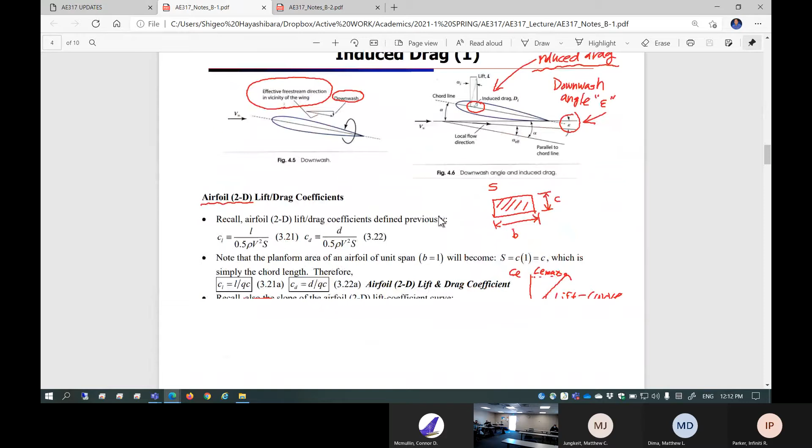I think where did I stop? I think we did page 7, right? In last class, example B11. This is a finite wing, okay? Finite wing, and then finite wing is designed based on the airfoil.

And then now you are computing how much lift and drag is developed for this finite wing, and you compare it against 2D wind tunnel test, which is a quasi 2D wind tunnel test, which determines the section lift and drag coefficients. And we compared together, and then we realize once you make your wing, obviously your performance is going to deteriorate. Lots of factors, but one of them is you're going to basically lose the lift curve slope because of the presence of downwash due to wingtip vortices. That's a big thing, okay?

So in order to create the same amount of lift coefficient, you really have to have higher angle of attack. And because you lose that, in order to have the same amount of lift produced for entire wing, you have to increase the wing area. Nothing is good, so that is the design of a 3D finite wing. So of course, 3D finite wing is based on the 2D airfoil analysis. But you need to understand, once you create the wing, all sorts of 3D effects come into play. Most of them basically is an adverse effect. So you hoped, based on the 2D analysis, you hoped this much lift coefficient, but you never get it. It's going to be always less than that.

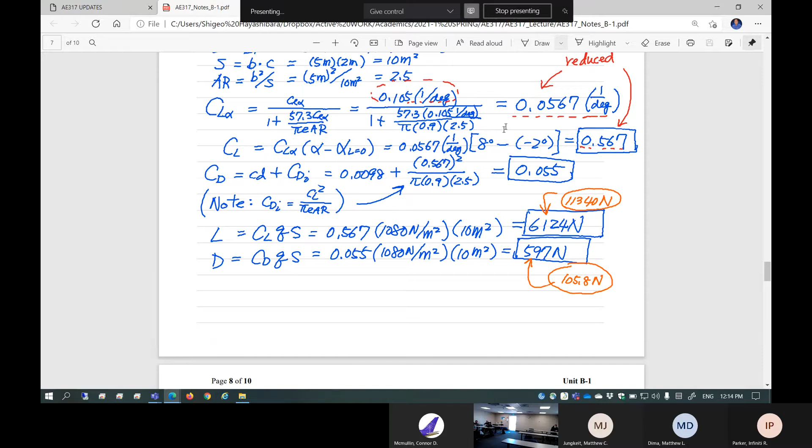Okay, so let me just add a few notes here at the end of this page. So I want to emphasize a few things. We talked about 2D airfoil, so this is your starting point. Now you looked at, based on the 2D airfoil cross-section, you're going to design 3D wing. Okay, so this is the performance.

So today, one more step. What is it? Whole aircraft. Here we go. Okay, so one more step is entire aircraft. Again, this is less performance, because the entire aircraft, the whole airplane, is composed of many things, such as tail surfaces, landing gear, and lots of unnecessary stuff, purely speaking, aerodynamically speaking.

You have to add all of those things. Antennas, wires, pitot tube, stuff like that. Surface is not that smooth, and then you're going to add more drag. As you add more, you're going to lose your lift, okay? So that's something we need to look at.

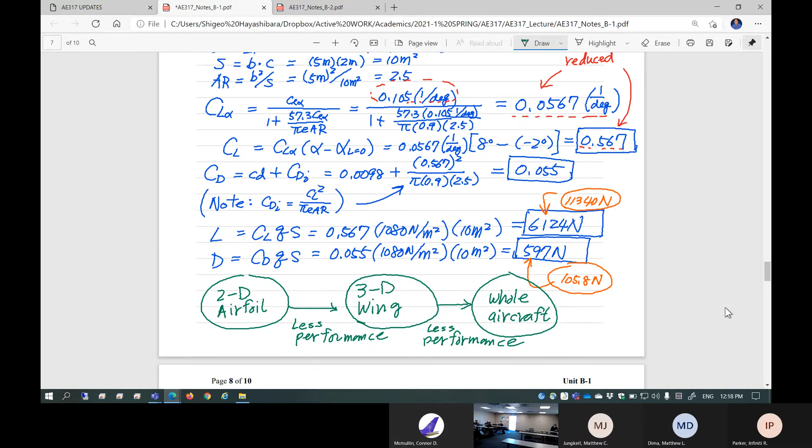I know you don't like it, but this is entirely necessary because the hand calculation actually reveals step-by-step theoretical way of calculating those things. If this class is taught by Dr. Ashworth, hand calculation is the only thing you can do. Okay, so the big difference here is I'm a computer geek, I'm using XFLR5. But somebody still needs to do hand calculation, sorry.

Okay, so let's move on, next page. So today's subject is high lift devices. You need to put high lift devices almost always, actually always, not almost. High lift devices are the device that - what is the purpose? Temporarily increase the lift, that's it.

Because when you take off, when you try to touch down, the demand comes in. You have to slow down the airplane to nicely touch down, feather touch landing. You have to slow down your airplane. You have to temporarily deploy high lift devices to minimize your stall speed. In other words, increase CL max. I think we talked about that in Aero 1. So this is the big purpose why you want to have flap. If you deploy the flap, you are going to temporarily increase CL max.

If the CL max is increased, the greatest thing about that is you can slow down your airplane and your airplane can still fly. So stall speed is going to be decreased. Okay, that's the whole point. However, this actually comes with cost. The biggest cost is, of course, it comes with increased drag. CD goes up at the same time.

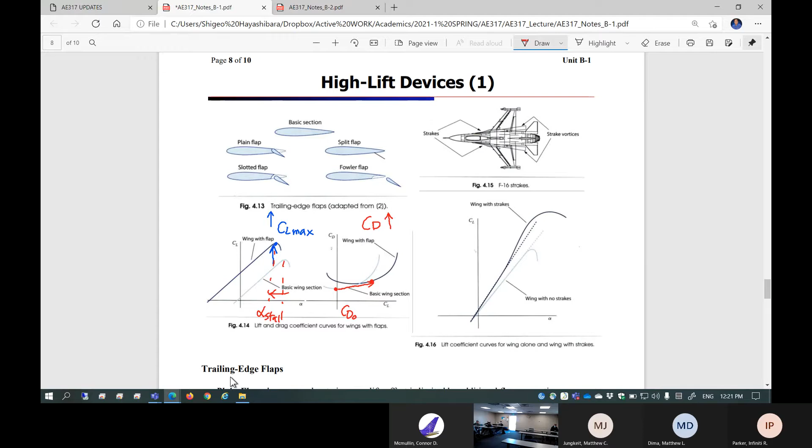Another thing is alpha stall. Angle of attack of the stall point is going to be decreased. So it's much easier to stall out if you fully deploy the high lift device and pitch up violently. Your airplane stalls very easily. So those are the things you have to pay the penalty for. However, at the same time, the greatest benefit is, of course, increase of CL max. This is what you need.

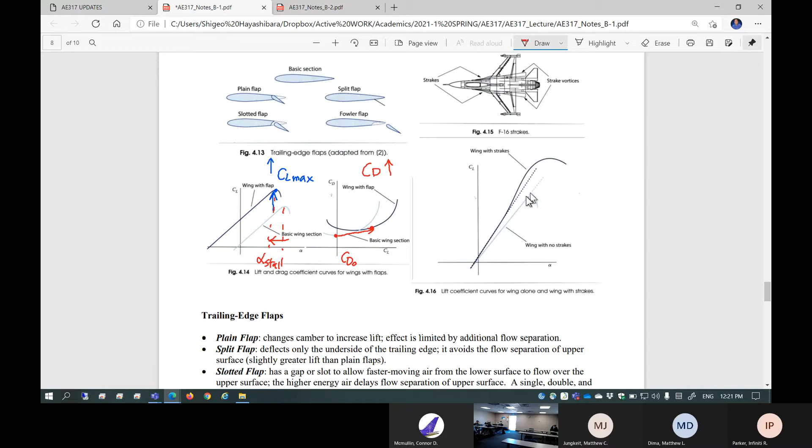So let's just take a look at a few different types of trailing edge flaps to begin with. Of course, we have leading edge flaps too, but the trailing edge flaps: you have a plain flap, split flap, slotted flap, Fowler flap. Do you guys remember those things from Aero? Let's just take a look at the documents. Do you remember those? You didn't do Fowler flap. Well, I mean, I showed you a document.

Bold Method guys. I love those people. Good pilots.

Let's just take a look at flaps. Here we go. So this is a document coming straight from there. Let's just take a look. So 4 different types of aircraft flaps. This is an explanation provided by airplane pilots. Bold Method is basically a training school for airplane pilots. So this is how they explain the flap system.

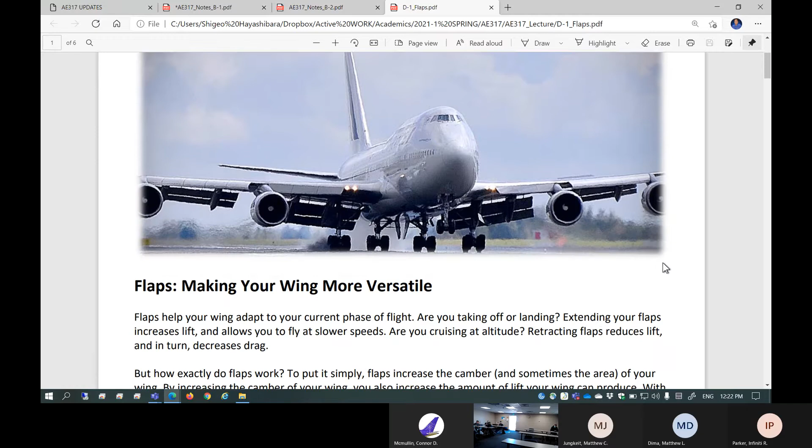Flaps, making your wing more versatile. Flaps help your wing adapt to your current phase of flight. Current phase means takeoff, landing, cruising, other things. Are you taking off or landing? Extending your flaps increases lift and allows you to fly at slower speeds. That's the big thing, of course. Are you cruising at altitude? You're not going to use flap for that because you're going to increase your drag. Retracting flaps reduces lift and in turn decreases drag.

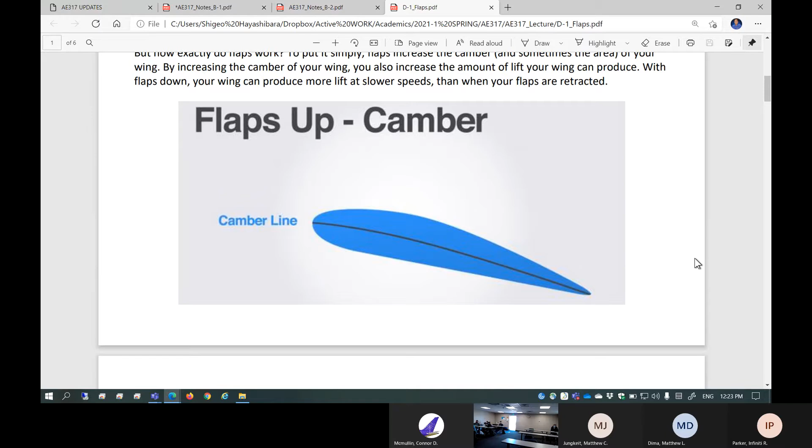So this is the clean configuration, something called flaps up. Normally, your airplane comes with a slight camber, so this is the normal situation. So suppose you have a wing cross-section that is slightly cambered. This is a cambered airplane, clean configuration at cruising. You're going to fly like this.

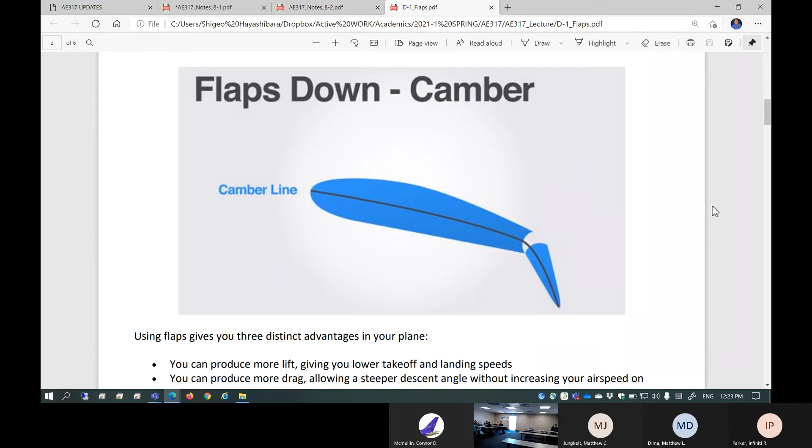Now, if you deploy a simple flap, this is a simple flap. You are going to actually increase the camber. As a result, you are going to increase the lift coefficient maximum value, CL max, and at the same time, you're going to introduce more drag. So this is a plain flap, first of all.

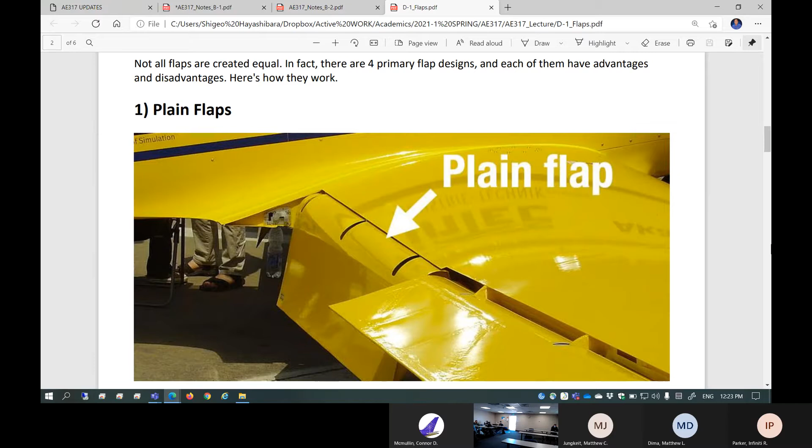So it's a very simple flap: just the trailing edge, about 20% of the chord, is going to be deflected downwards at an angle. In this case, this is a really high angle. This is like a 60, 70 degree deflected plain flap.

I'm not sure what this airplane really is. Probably a racer, Reno racer. World War II airplane based, maybe. I don't know what airplane it is.

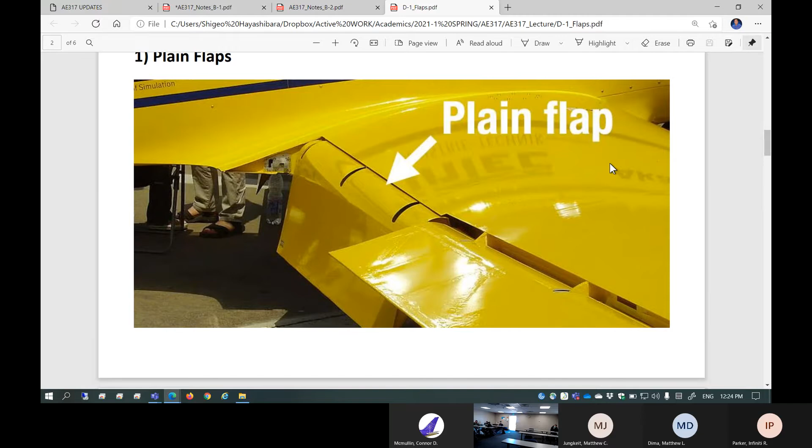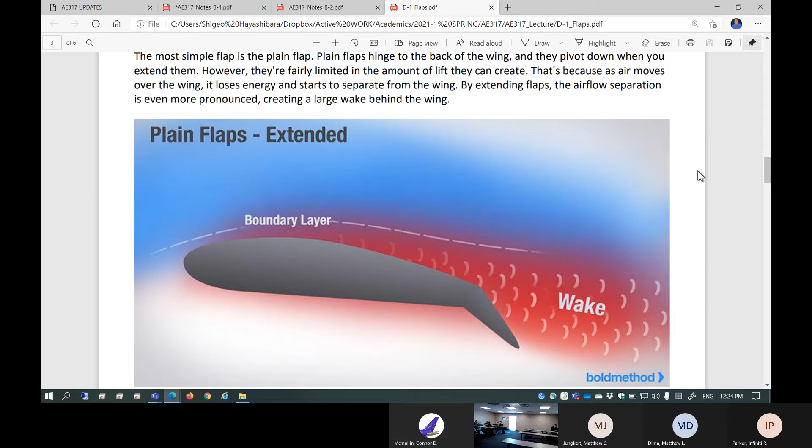But this is the plain flap. If you extend it, you are going to purposefully induce flow separation on the top surface, creating a huge amount of wake. That means a massive increase of drag and very turbulent flow behind the wing. But as a result, you are going to increase the camber with lots of penalty of drag increase. So this is a plain flap. It's a very simple idea.

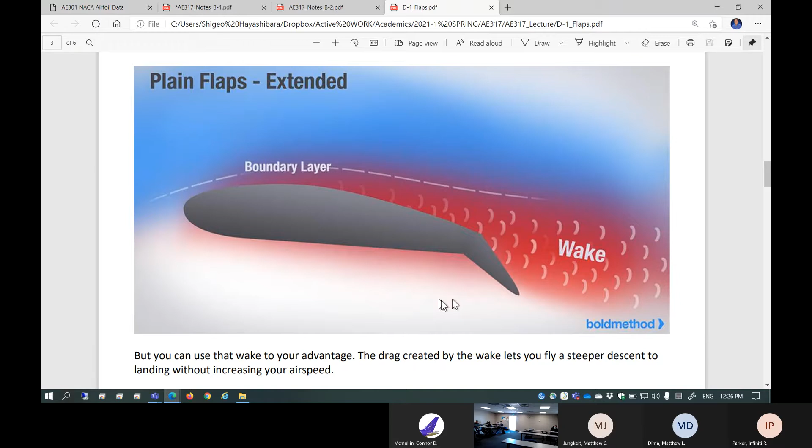Okay, so now, where is it? Oh, okay, this one. So this is the plain flap. And then the idea here is, well, I don't want to have lots of induced flow separation wake, so let's just deploy only the bottom half of it. It's called the split flap. This is a common choice for World War II airplanes. Split flap basically retains the top surface, but only deploys the bottom. It's completely split. So this is a split flap.

You're going to retain the top surface, so you're going to minimize the flow separation and the wake, but at the same time, you're going to effectively increase your camber. So this is actually much more efficient compared against the plain flap. Okay.

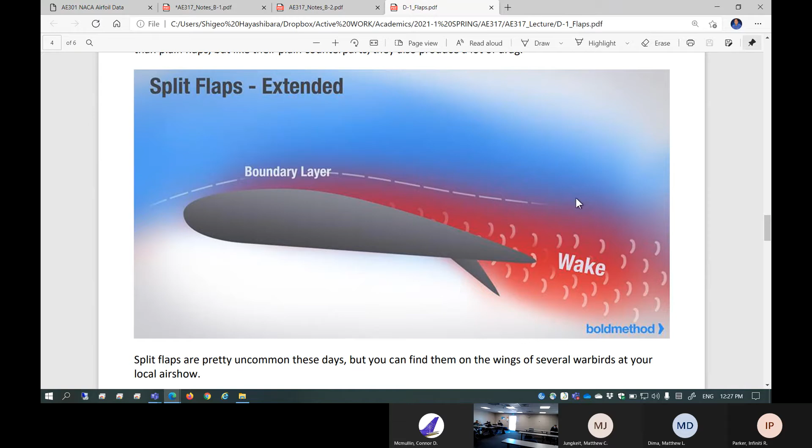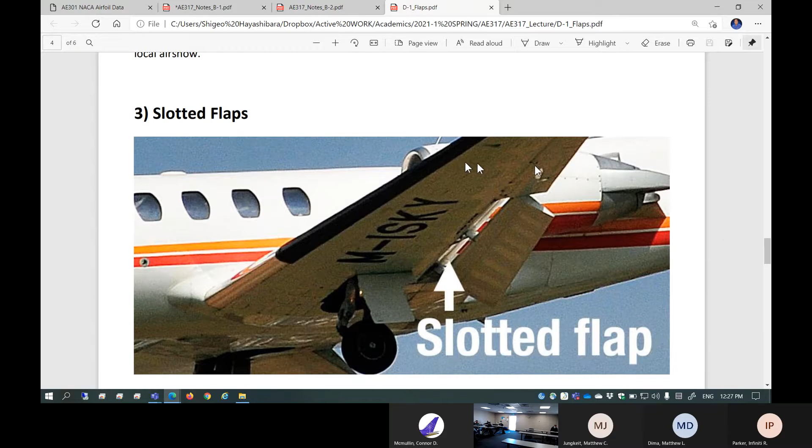Number 3 is a slotted flap. Okay. Typical choice for today's smaller scale business jet type of thing. Slotted flap introduces the slot. So you're going to purposefully introduce a portion of the flow going through this slot. If the flow is going through the slot, it is going to accelerate. Okay. So here we go.

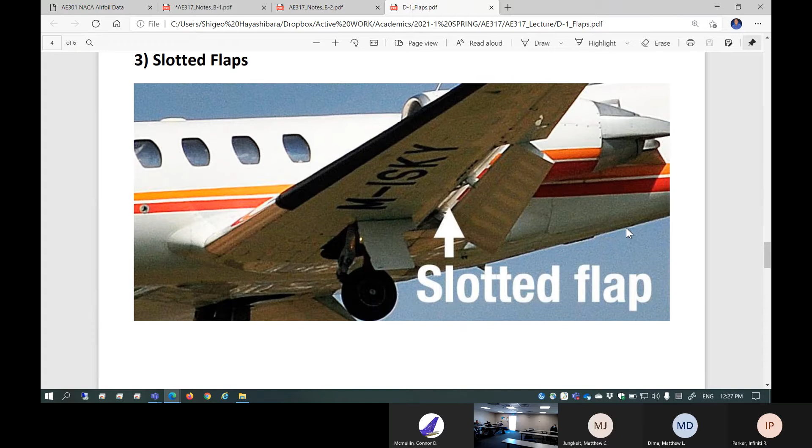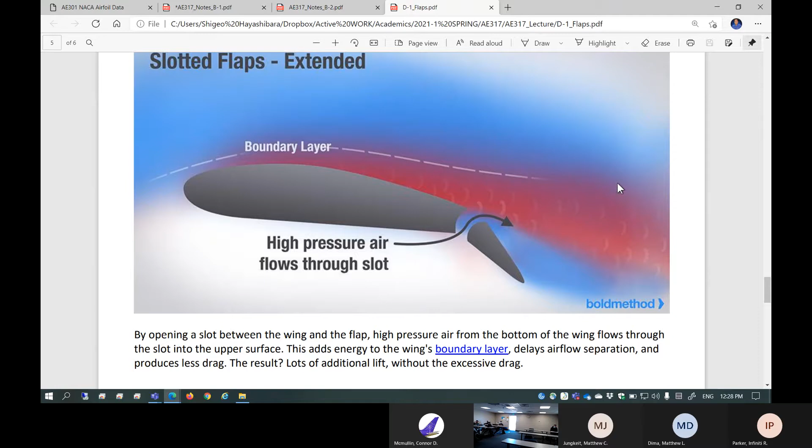So you're going to introduce high pressure accelerated flow over the top surface of this flap. That is going to completely prevent the flow separation. So the flow is much cleaner compared against the other 2 types of flaps. Okay. So this is going to actually induce the reattachment of the flow over the surface of the flap. So efficiency goes up for the flap.

And then, of course, if you take a flight to go back home, this is not the airplane cross section, right? Have you ever sat right next to the wing when you go home? And then right before the final landing approach, can you take a look at the wing? Then people say, oh my goodness, this is so dirty. I can see almost everything. Yeah, that's Fowler flaps. Here we go.

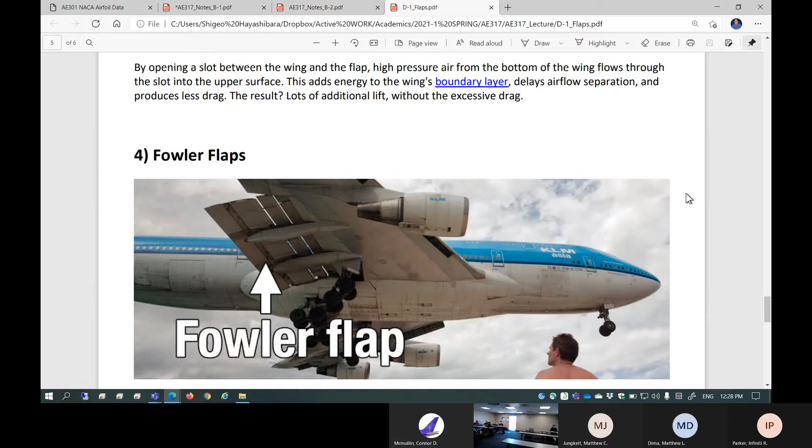Okay. So Fowler, the name means that you actually stretch out the area. Stretch out the area. So wing area is going to be increased at the same time as camber. So this is the Fowler flap. So this is a double slotted Fowler. Not only do you include those slots, at the same time you're going to stretch out the trailing edge so that now your entire wing area is bigger. At the same time, camber is increased.

And also you introduce the slots, so accelerated high pressure flow flows over the surface of those flaps, preventing flow separation. So today's jet airplanes, by employing these Fowler flaps, can actually really slow down amazingly.

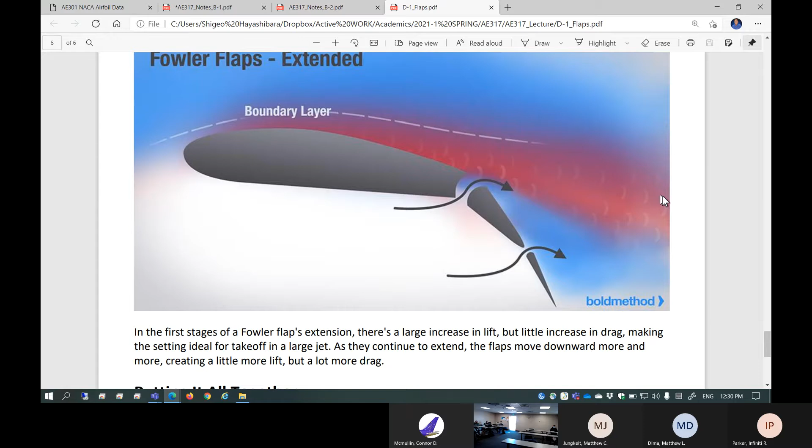There is a flight simulator in my research lab, and there is one airplane which is an Airbus A380 in a smaller scale, radio control type. You can actually fly it in the simulator, and you'll be amazed how much you can slow down. My goodness, it's almost stopping in air. You can slow down that big airplane just like that using this type of Fowler flaps. Okay, it's kind of fun, flying those things in a flight simulator, and you can really slow down that airplane. Okay, still flying.

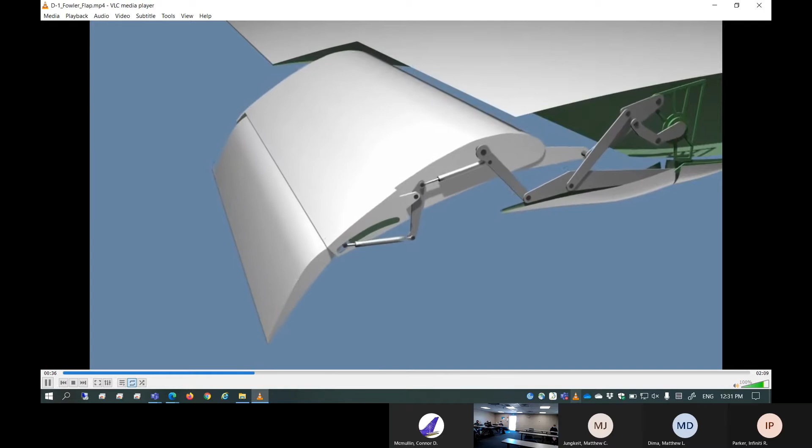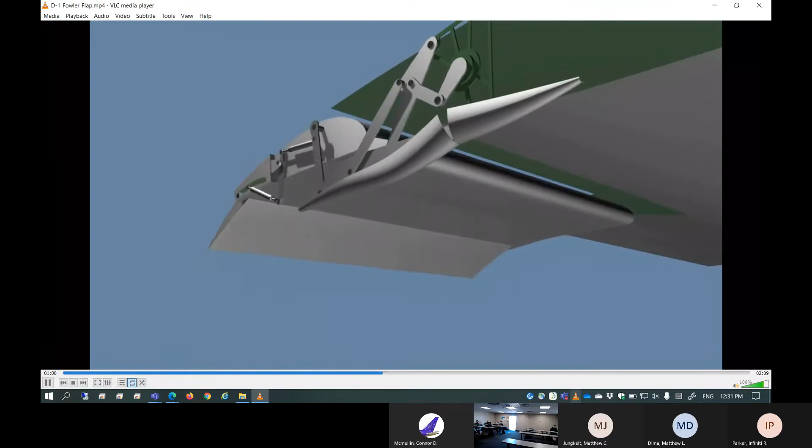I don't know if it says that I'm a big nerd or not, but I've seen this video before. This is how

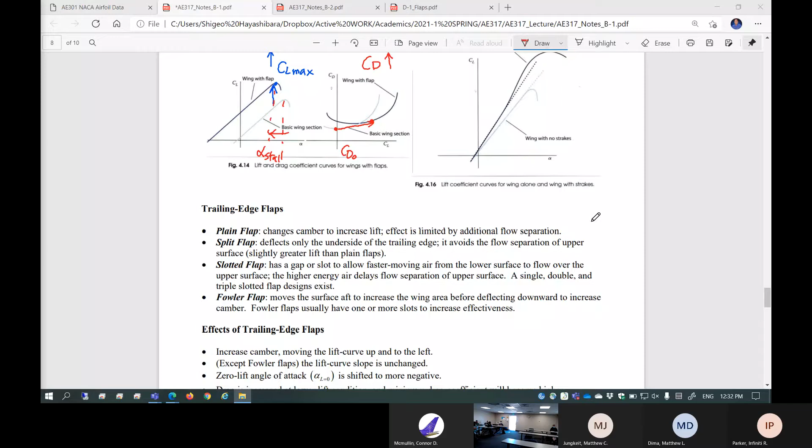Cool. So if I end up teaching senior design, I'm going to probably force students to come up with something like this, especially structures guys. And then aero guys, you guys basically become a master of XFLR5 and design everything in computer, and then come up with the performance prediction before you even build it. And then how much performance prediction and the actual performance differ is going to be your grade kind of thing.

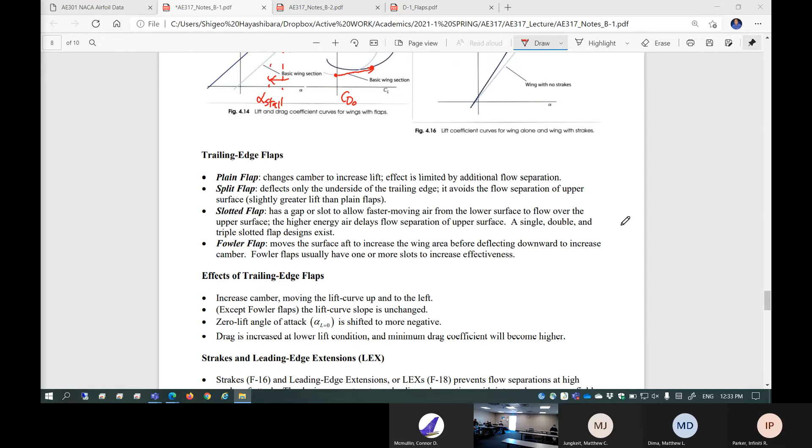Yeah, if the performance is off by like 50%, you fail. Too bad. You have to repeat this again and again. Just kidding. I can never do such a thing.

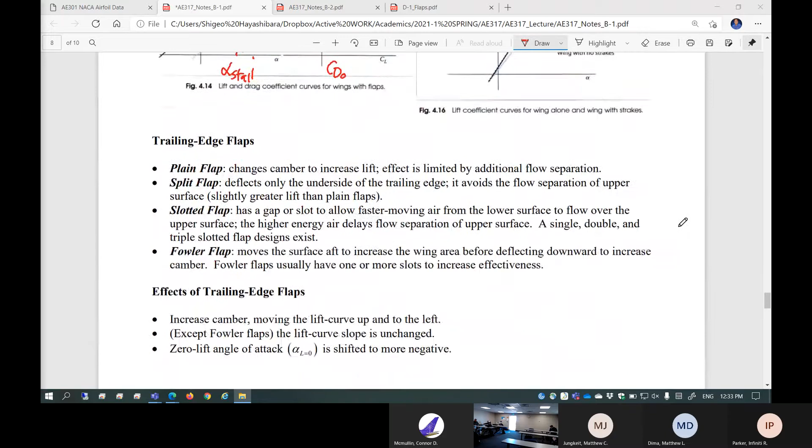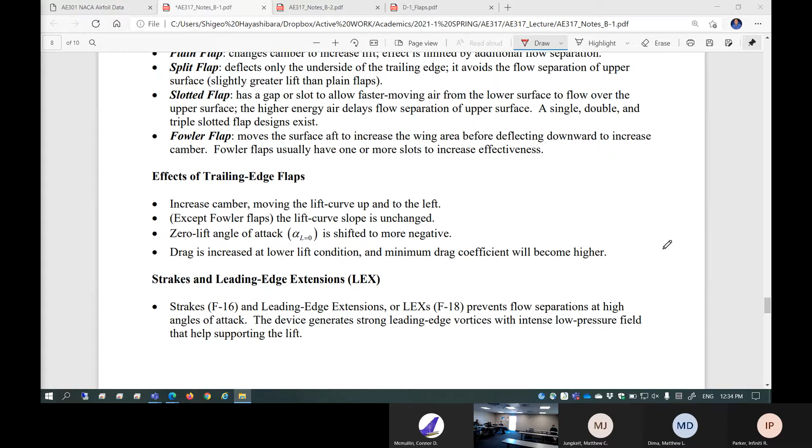So anyways, that's the high lift devices. So obviously high lift device design and sizing is going to be included in this project this semester. Don't worry too much about it because you can find out easily that XFLR5 actually integrates those high lift devices and control surfaces, and then you can actually compute and predict. It's a really fun thing to do, okay? Because if you do everything by hand, it's a nightmare, of course. Using software, you can probably do it in a few hours, at least, okay?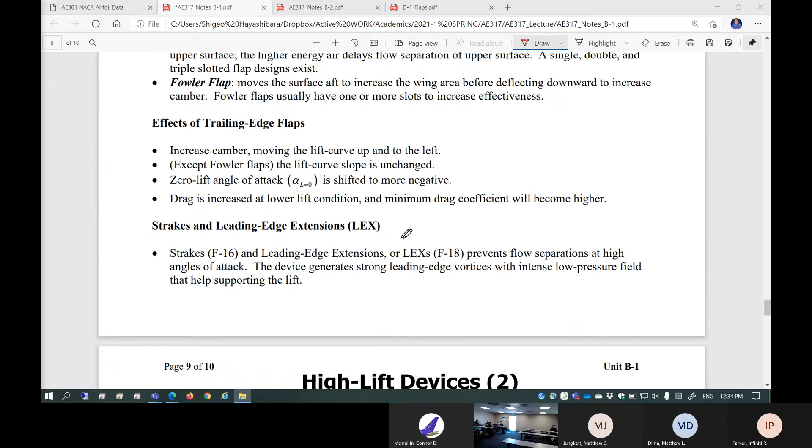And also another thing is some of the airplanes come with naturally attached strakes and leading edge extension, LEX. These are additional control surfaces, for example. Here we go. This is the F-16, which actually has strakes, and then F/A-18 Hornets have a leading edge extension that is actually going to create vortices at the tip of the strakes. Those vortices are going to impinge on your main wing, actually adding more lift to it. It's called the delta wing apex vortices.

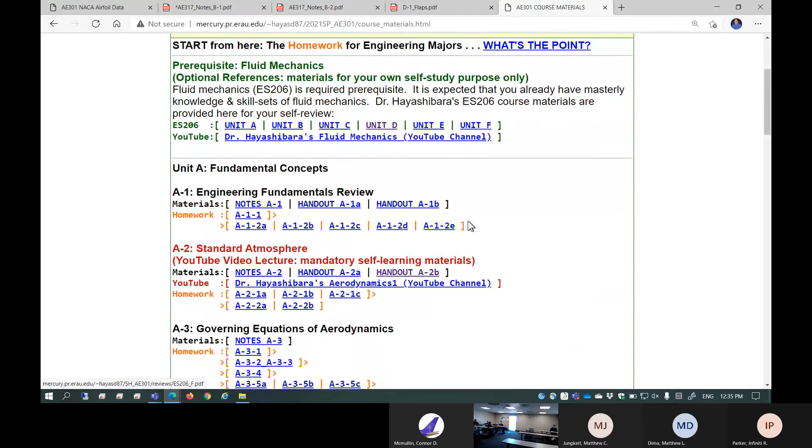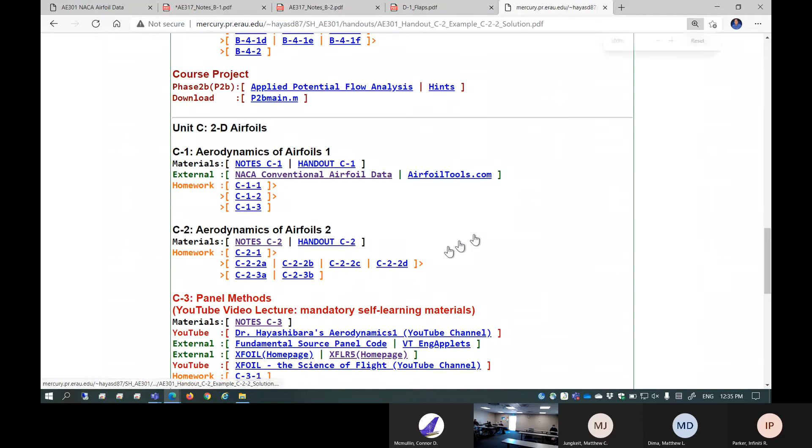Have you ever seen that in aero? Do you want to take a look at it in aero? Delta wing, okay. So if you go to the aero page, delta wing. It could be a handout, sorry. Yeah, this one. No? No. Yeah, here you go. So delta wing.

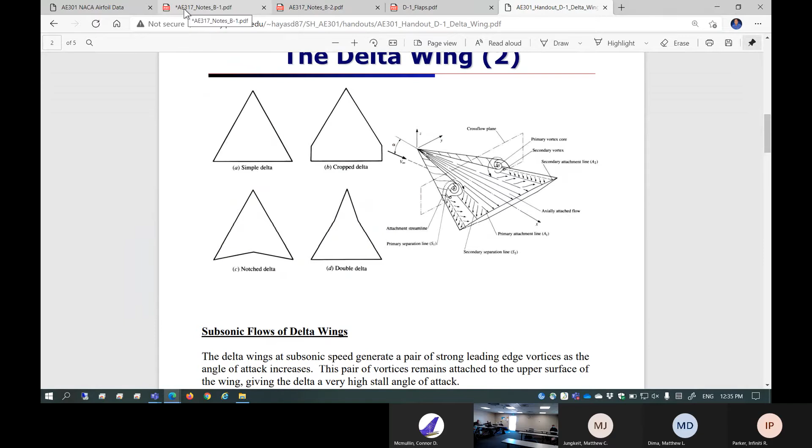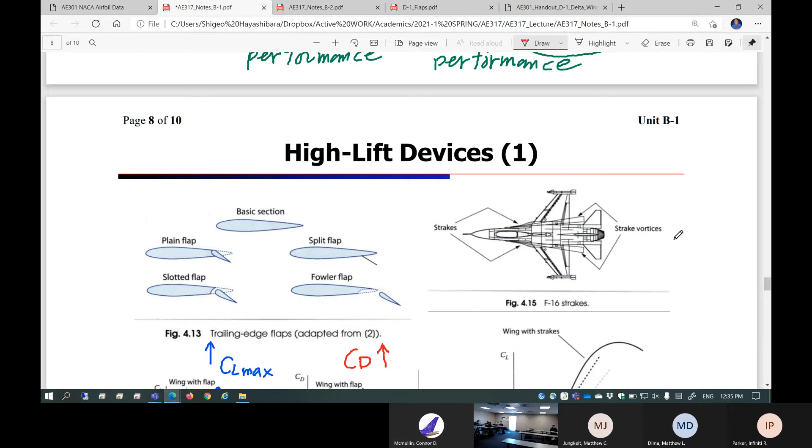So the idea of leading edge extension is that a delta wing actually creates a twin pair of vortices. These vortices actually create the lift. It's vortex lift. So your idea is basically creating those two vortices, just like delta wing apex vortices. And those strake vortices actually add some lift to the main lift of the wing. Okay. And then there's a way to estimate the additional lift created by the strake vortex, which I'm going to cover in, I think, unit B3.

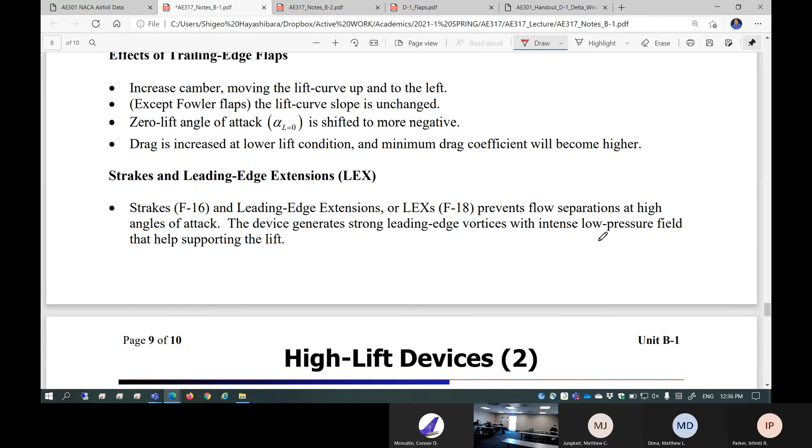Okay. There's no downwash from those vortices? No. This kind of flow field itself actually creates lift, something called vortex lift. Obviously, yeah, it's a good point. Of course, if you have a vortex like this, it is going to add more downwash. So your main wing is already placed inside the downwash of those twin vortices. But with this vortex, suppose if you pitch up, the vortex is going to come like this. Pitch down, it's still going to come like this. It's fairly parallel to the incoming flow.

So it is actually going to create a steady lift coefficient for all ranges of angle of attack, especially high angle of attack. That is quite important. It is going to be additional lift at high angle of attack, because the main wing cannot create lift at a really high angle of attack. You can't do that. But suppose you have that kind of surface, especially beneficial for a fighter airplane like this, it is going to support the lift at a very high angle of attack.

Okay. Now back in the 1990s, I was a graduate student, and we watched one of the air shows in Moscow, and there was the brand new Russian airplane, the Su-27. That airplane comes with this strake and also a canard in the forward surfaces. And one of the performance demonstrations of that new Su-27 version was the Cobra maneuver. Do you know the Cobra maneuver? The airplane is flying like this, pitches up beyond 90 degrees, pitches down and flies like nothing happened. It's called the Cobra maneuver.

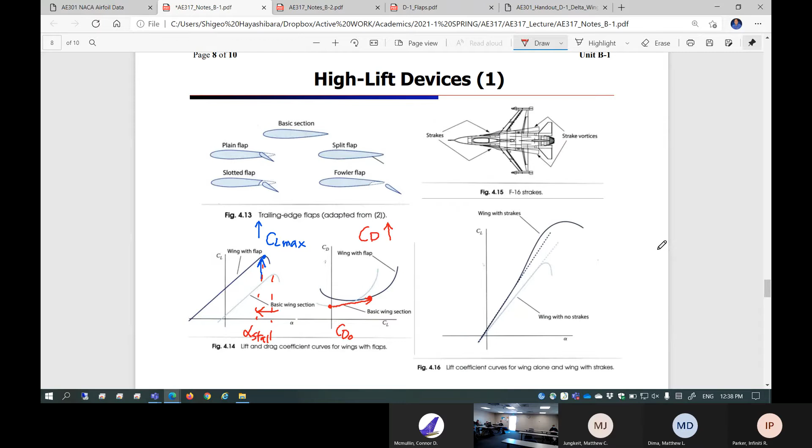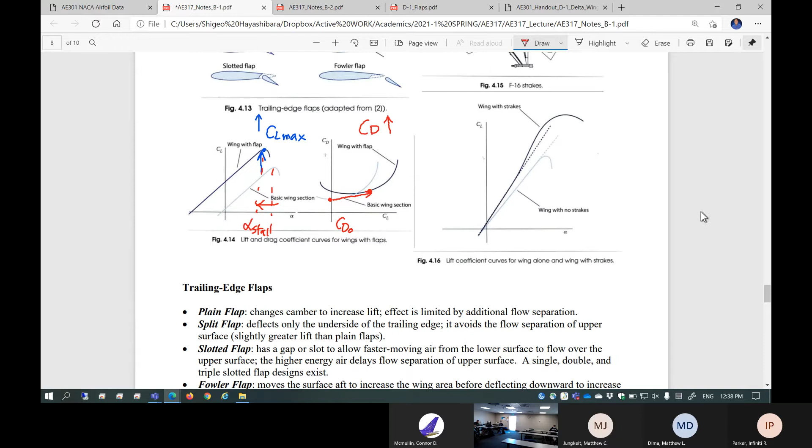And that blew away all the graduate students watching that air show. I was there too. And then we brought that discussion into the classroom, and the professor and students started to argue. Oh, they're faking, the Russians are faking that. No, it's not. Anyways, the Cobra maneuver, that's a pretty interesting maneuver.

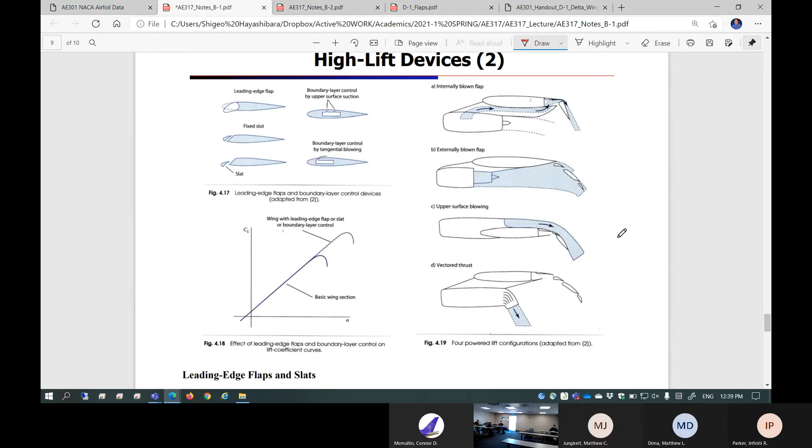You purposely place your flap or high lift devices inside the wake of the jet engine so that you use the jet hot gas exhaust hitting on the surface. This is the upper surface blowing. This, by the way, is the technique used for the airplane sitting right next to the bookstore.

With this kind of wing, how can you slow down your airplane? You need to have some kind of gimmick just like this. This is called upper surface blowing. In other words, engine exhaust hits the surface of the flap system, preventing flow separation.

If you are designing a low-speed airplane, you're not going to choose a wing shape like this, right? This is a horrendously bad airplane for low speed. So you have to do something.

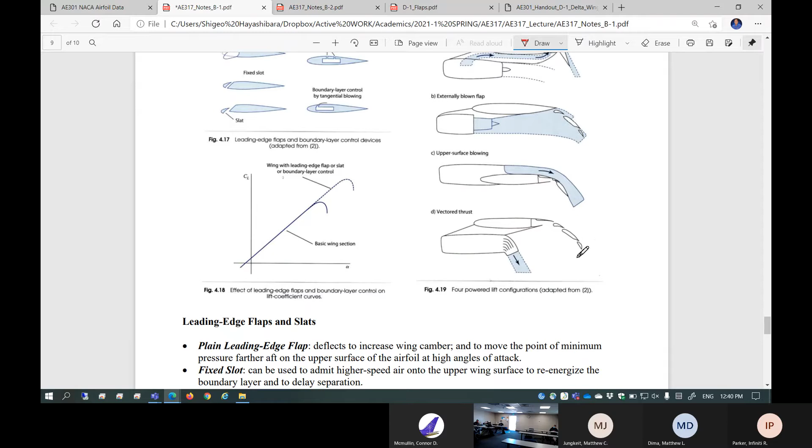The other one is vectored thrust. Obviously this is what the F-35B, and also the Harrier, use. It's a classical design of vectored thrust.

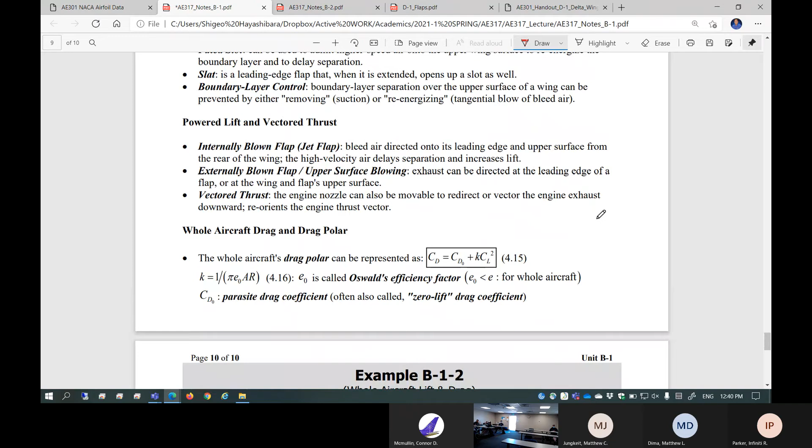So let's just stop and take a look at this thing. Now, all of a sudden, very suddenly, I'm talking about the whole aircraft. Whole aircraft means everything: airfoil, 3D wing, plus all others. This is the whole aircraft.

As you look at the entire aircraft, as you design it, it is very difficult if you do it entirely by hand, but you can do it fairly easily using software. That's the beauty of using software. You are going to define the entire aircraft drag polar. This is not something you can do easily by hand. You need software just like XFLR5.

But after you put everything together, you choose your 2D cross-section, build the wing, put the fuselage and tail and control surfaces and other things. Then decide the location of your engine and propeller, and put the mass distribution on it, landing gear, and so on.

Now you can pitch your entire airplane up and down to come up with the whole airplane drag polar. You can do that in XFLR5. That's one of the greatest benefits of that software. If you're designing by hand, this is near impossible—you can only guess. So this is one of the greatest things you can do: the whole aircraft drag polar.

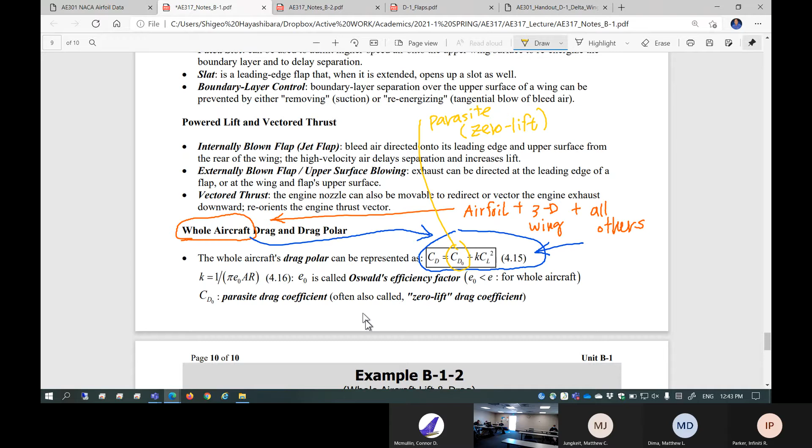Then as your airplane starts pitching up and producing lift, and more and more lift, your drag increases based on the lift. This is called induced drag, or drag due to lift. So there are two different kinds of drag coefficient you need to consider.

Those two different kinds of drag coefficient can be represented by a polynomial function, and you can find out and squeeze out that polynomial function information using software. At this moment you realize, hey, using this software, you can do something you can never do by hand, at least not easily.

So this is called the induced drag, or drag due to lift. Interesting thing is, as you increase your lift more and more, you're also going to increase your drag. Too bad.

Okay, so this is the whole airplane. Interesting thing is this K factor. This K factor now includes something called E0.

E0 is called Oswald's efficiency factor, because this is for the entire airplane. Now, if you remember from last class, we introduced the span efficiency factor E. You remember that? E is the span efficiency factor.

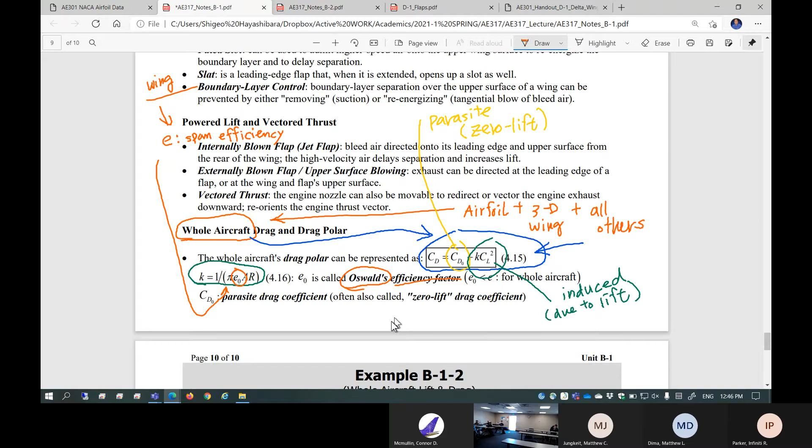Okay, so let's differentiate. E is the span efficiency for the 3D wing. This is going to be even further reduced to Oswald's efficiency factor after you put everything together to make the entire airplane. Let's be very careful about the terminology. I'm going to introduce you for a moment here.

The handout. Okay, let's just take a look at the handout. Handout B2A, before you even get into B2. This handout is quite important. Let's just take a look at it.

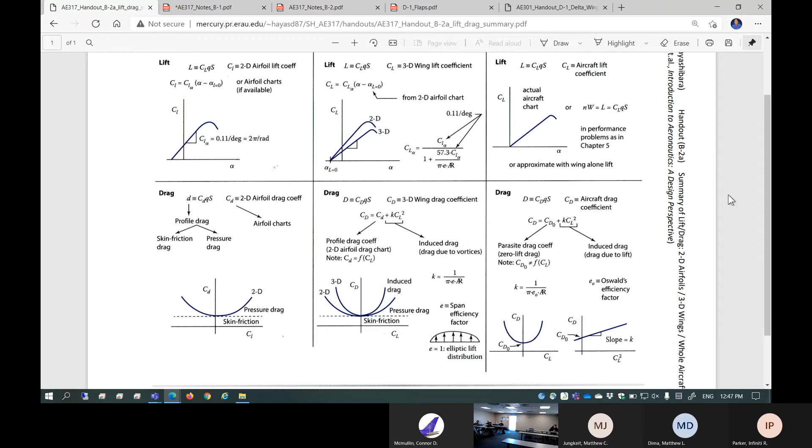This actually summarizes all three differences: one is 2D airfoil, the other one is 3D wing, last one is whole airplane. This one-page document is so wonderful, so I decided to put it as a handout. Essentially, in order to understand airplane aerodynamics, this is all you need. This is so good, I fell in love with it.

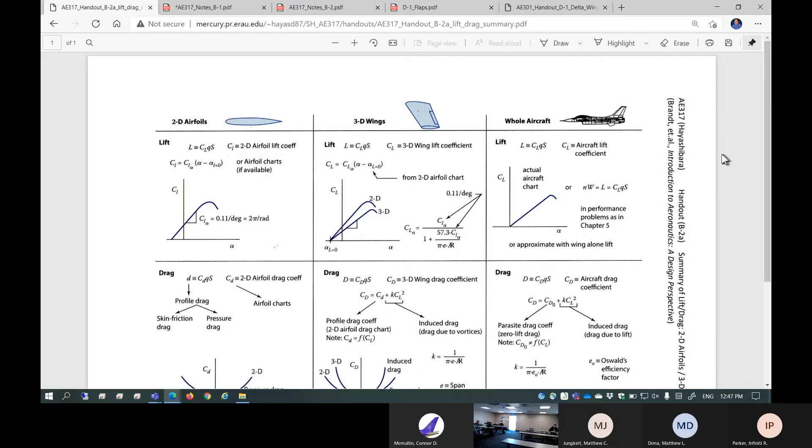So for 2D airfoils, lift is basically the 2D airfoil lift coefficient. This is a prediction of the lift coefficient. This is the lift curve slope, usually 2 pi per radian, of course you know that. If you create the wing out of a 2D cross section, obviously you're going to reduce the slope.

Now this CL is the 3D wing lift coefficient. Now CL alpha is reduced from CL alpha. This is the equation, of course. Then suppose you create the whole airplane, now everything is included. So this is the CL alpha plot, and then you have to think about load factor N.

Load factor N, we're going to talk about that. Drag coefficient is more complicated. So you begin with the drag polar for the 2D profile. The 2D profile consists of two things: skin friction drag and pressure drag. Skin friction drag is this much. Pressure drag is basically, as you increase your lift, you increase your drag. You can get all this information from airfoil charts: NACA 4-digit, 5-digit, 6 series. You can look up and get those data sets here.

However, if you design your 3D wing, obviously it's not going to be the same thing. Of course, span efficiency factor comes in here, K CL. This E is the span efficiency, the wing's efficiency. And CD here is the profile drag coefficient—the 2D data comes into play because CD doesn't change. Pressure drag is different. Skin friction drag doesn't change from 2D to 3D. However, for the 3D wing, you're going to have more drag, obviously.

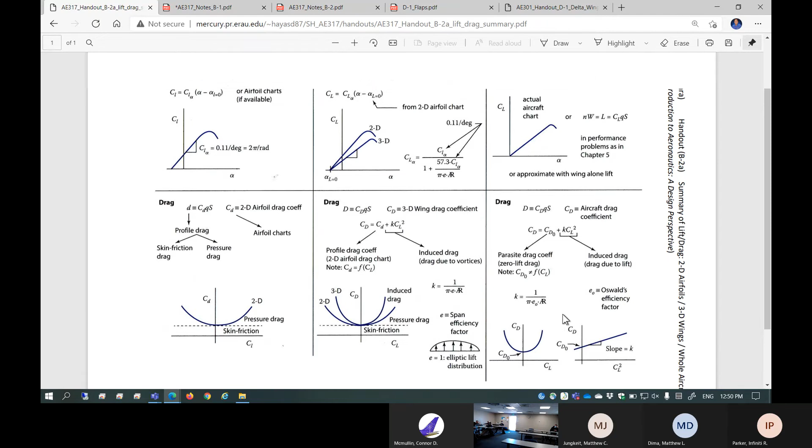And then, the entire airplane—obviously now you introduce Oswald's efficiency factor right here. This is even worse than that, because the entire airplane now comes into play. So this CD0 is the parasite drag coefficient, or sometimes called zero lift drag coefficient. Now you have an entire airplane drag polar. This is CD0, CL squared, CD—slope is K.

This is basically the induced drag coefficient plot. So this is the CL alpha plot for the entire airplane. Usually for the entire airplane, zero angle of attack means zero lift, typically, because when you design your airplane, if you don't pitch up, you don't want to create any lift. If you put in camber, obviously you introduce alpha zero lift, but that's essentially the subject of the wing. As you design your actual airplane, alpha zero lift is usually zero.

So there are lots of differences. Do not get confused—it's so easy to mix up this CL with this CL with that CL. Those are all different. And at the same time, this CD with this CD with this CD—those are all different too. You have to differentiate between all three: one is airfoil, one is wing, one is the whole airplane, okay?

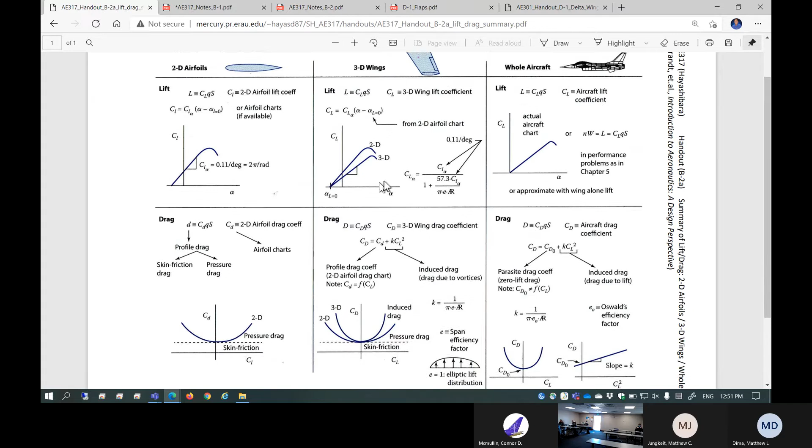All right, let's take a look at page 10, example B-1-2, whole aircraft lift and drag.

So let's think about the Avro Vulcan jet bomber. Have you ever seen this? Do you know what the Avro Vulcan is? Let's Google and find out.

So this kind of airplane, here we go. Why is this airplane chosen? Because it almost looks like just a wing, little bit of fuselage. And then this is interesting—it's not quite a delta wing. It's like a delta shape, but you have a finite chord at the tip.

But there's no tail, right? So this is a classic design of tailless delta wing. You can actually make it stable without the horizontal tail. Tailless delta, how about that? People still make this kind of airplane—people in France still make it. The Mirage. Okay, so this is the Avro Vulcan.

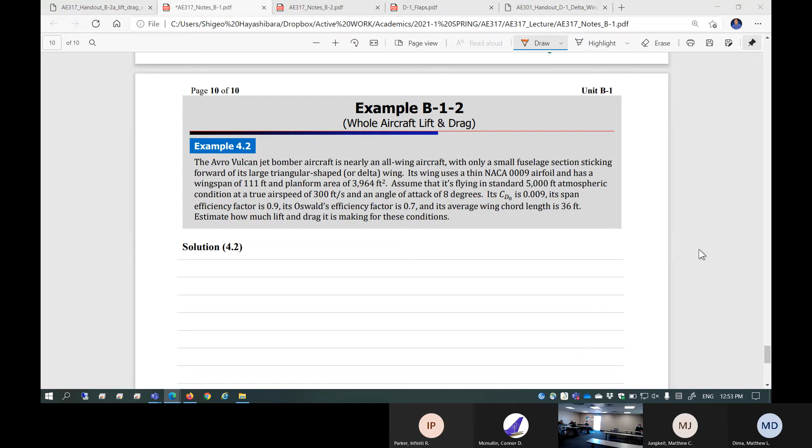So the Avro Vulcan jet bomber aircraft is nearly an all-wing airplane with only a small fuselage section sticking forward of its large triangular-shaped, or delta, wing. Its wing uses a thin NACA 0009 airfoil.

I don't think this is correct, but let's just follow through with it. Its wing uses a thin NACA 0009 airfoil—this is a symmetric cross-section, 9% maximum thickness at the quarter chord, NACA standard 4-digit. And it has a wingspan of 111 feet and planform area of 3,964 square feet. That's a huge planform, okay.

Assume it's flying in standard 5,000 foot atmospheric conditions—let's assume 5,000 feet standard atmosphere, true airspeed of 300 feet per second, angle of attack 8 degrees. Now interestingly, its CD0 is 0.009. This is given.

Quite interestingly, you can never get this information unless you design and analyze it as a 3D entire airplane, okay? Entire airplane, because this is the parasite drag coefficient of the whole airplane. Now if you design everything by hand, this kind of information can only be obtained by actual flight testing. So anyway, this is given.

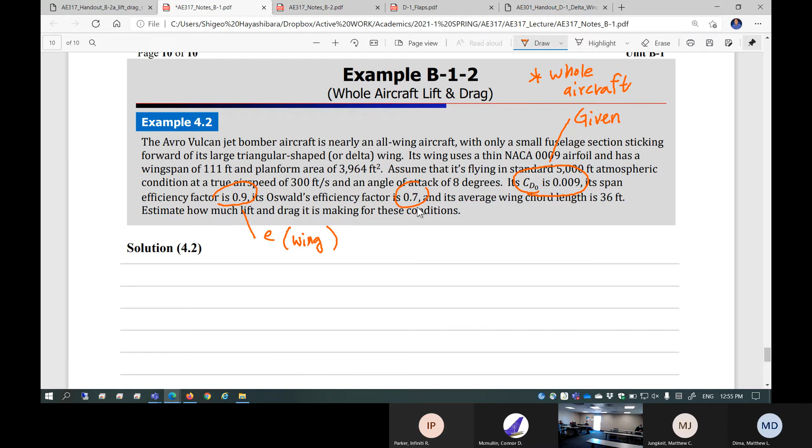Span efficiency factor, 0.9—this is e, isn't it? So this is only for the wing, not the entire airplane. So the wing has a span efficiency of 0.9. Oswald's efficiency 0.7—this is for the entire airplane, e0. This is whole aircraft.

Okay, so let's notice the difference. One is span efficiency, which is wing only. The other is the whole aircraft's Oswald's efficiency factor, which is really less than that. Average wing chord, 36 feet—let's call that c-bar, average chord. Obviously, the wing is not a rectangular wing, it's almost triangular, so you have to take the average value of chord.

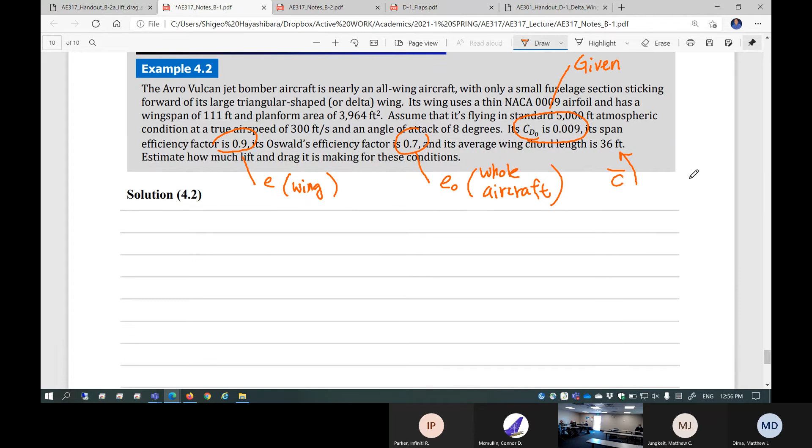So let's estimate how much lift and drag it's making for these conditions: 8 degrees angle of attack, true airspeed 300 feet per second, standard 5,000 feet altitude. So what is the first step, you think? What is the very first thing you want to do? Let's find out Reynolds number.

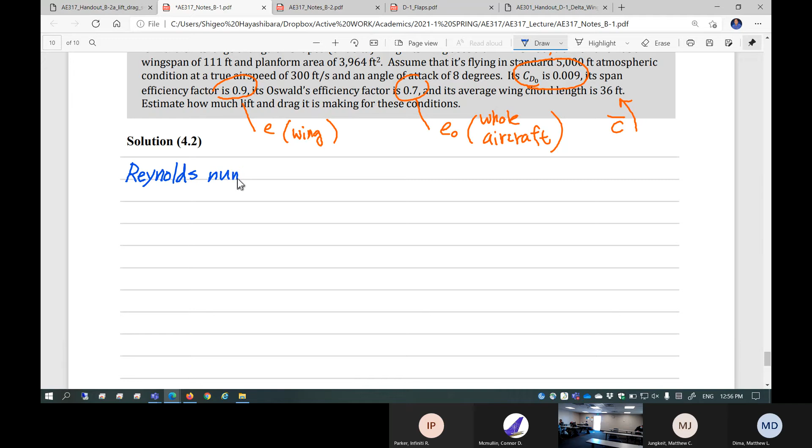Reynolds number, based on 5,000 feet standard altitude. Okay, so let's just find out. Flight condition Reynolds number is density times velocity times chord length, divided by viscosity.

So I'm going to plug in all the 5,000 feet standard values. Density at 5,000 feet standard day: 0.002048 slugs per cubic foot—this is the standard 5,000 feet value. Velocity, or true airspeed, is given as 300 feet per second. Average chord length, 36 feet. Viscosity at standard 5,000 feet altitude: 0.0000003637. This is a weird small number because we're sticking with standard units, slugs per foot-second.

Some people don't want to use this kind of weird small number, so they use pound-mass instead, but you have to combine units anyway, right? Okay, so if you compute that, you should get a Reynolds number of 60 times 10 to the 6. This is a very high Reynolds number.

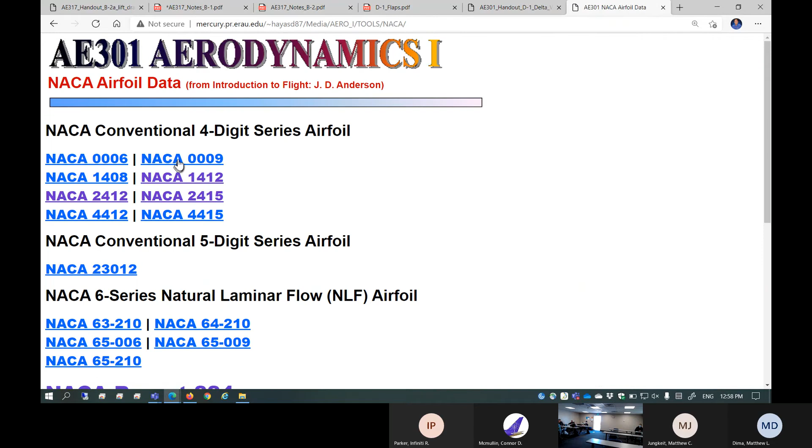So if you go here, NACA conventional airfoil data, NACA 0009—here we go. This is the NACA 0009. The highest Reynolds number you can have is 9 times 10 to the 6. This is the highest value. In this case, our Reynolds number is 60 times 10 to the 6, so it's an order of magnitude higher than the data available. This is the highest Reynolds number available in this data set.

And this is your Reynolds number. So the problem—the problem is with the NACA 0009 data set.

Highest Reynolds number is only 9 times 10 to the 6th. Can you still use this data? Somewhat, yes. You know why? Because you have to understand for higher Reynolds number, is it a beneficial or adverse effect?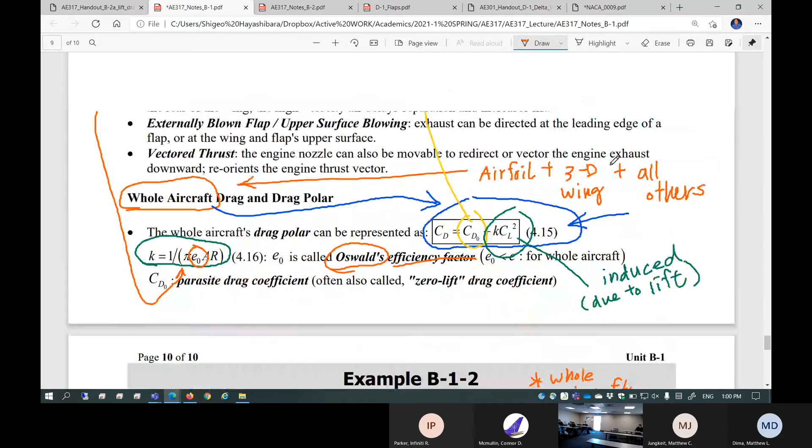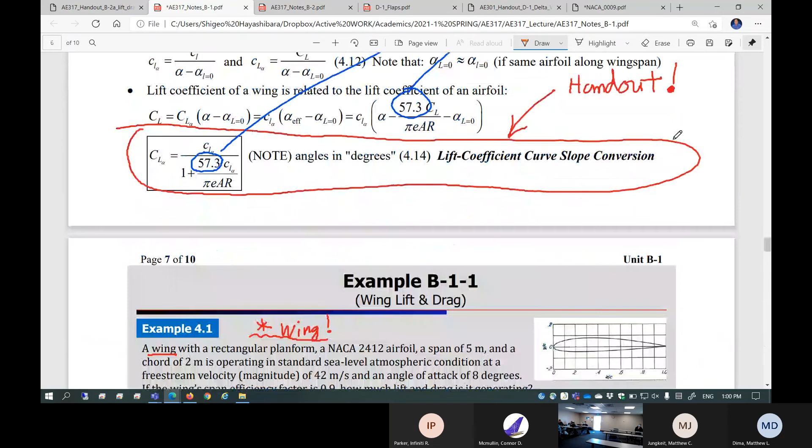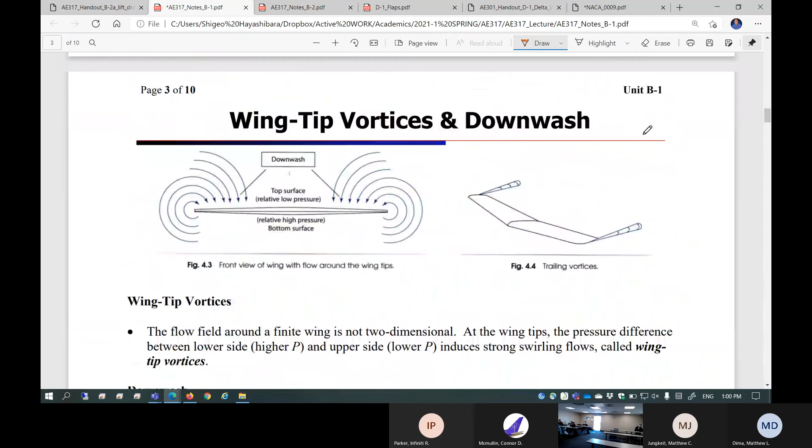Let's just go back and take a look at it. So if the Reynolds number is higher, what happens? Reynolds number effects, did I cover that? For higher Reynolds number, what happens? Wait, yeah, higher lift coefficient and... where is it? Oh, it must be in unit A2 or something. Do you remember those? Is it good or bad to have a higher Reynolds number? It's good, usually.

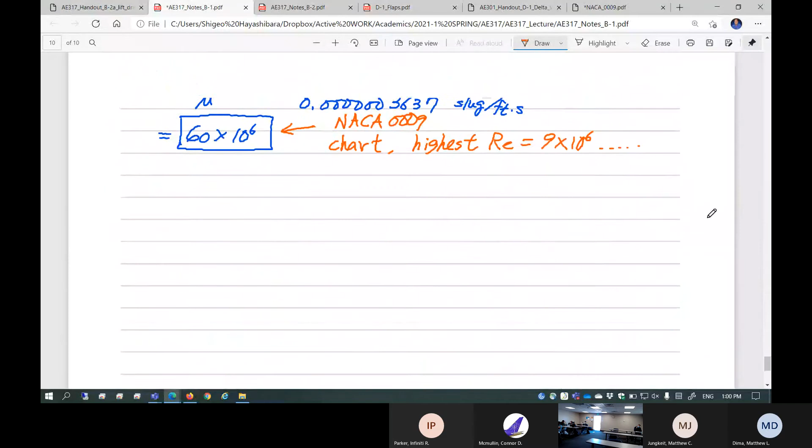Let's just remember, okay? So one more time. Let's just go back to the notes of probably A1 or A2, I'm not sure. Note A2 maybe. So what is the Reynolds number effects? Here we go. No, this is effects. Okay, this one, okay, here we go.

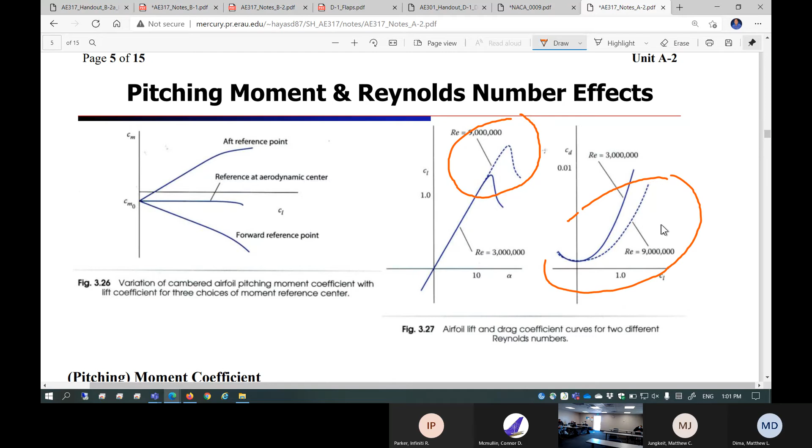Reynolds number effect: if the Reynolds number is higher, usually a very good effect on lift. You're going to expect more lift. How about drag, which is also good? Higher Reynolds number means less increase of drag for higher lift coefficient. Both favorable. Okay, so suppose if you are looking at...

NACA 0009, the data set's highest Reynolds number given is 9 times 10 to the 6, which is this data set, right? That is usually the lowest possible drag polar. So for higher Reynolds number, what do you expect? You're going to probably expect this kind of plot, right? This kind of plot, okay? So it's not so bad using this data set. Actually, this is a conservative estimate.

How about the lift? Of course, lift is almost unchanged for any Reynolds number. But here's the highest Reynolds number, you are going to actually increase the lift. So as a reality, you can expect this kind of thing, but you never know. But of course, you can use this data set as a conservative estimate, right? So that's what we're going to do.

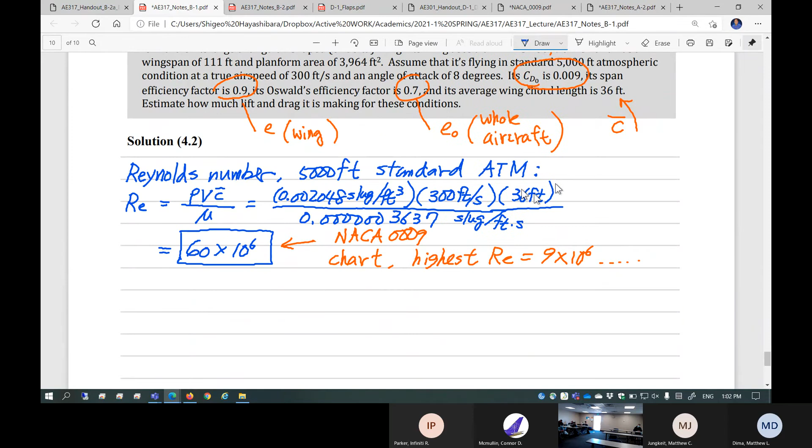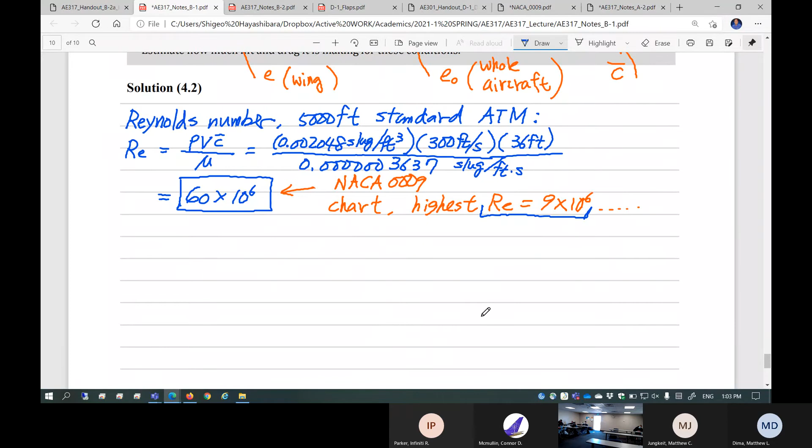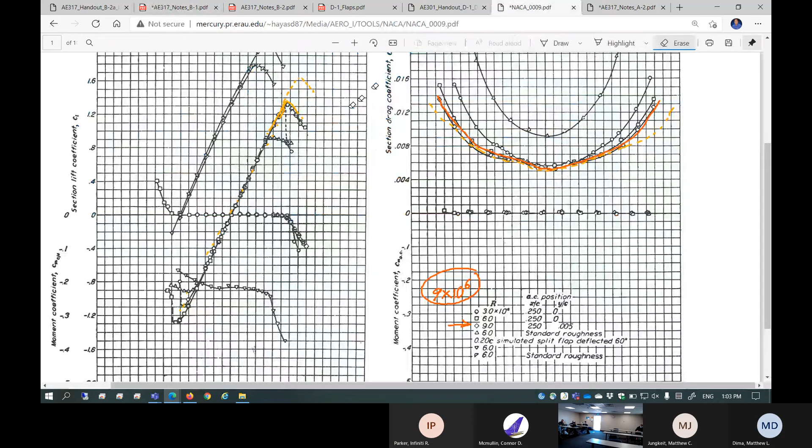Okay, so let's just go back. So this is the Reynolds number. You're going to actually pick this Reynolds number from the given NACA data because it's a conservative estimate. Okay, so first of all, this is the symmetric airfoil. Because this is a symmetric airfoil, alpha zero lift is equal to 0, okay? Alpha zero lift is 0. Let's just double check, alpha zero lift is 0 right here. So if you do not pitch up, you're not going to have lift. Alpha zero lift is 0 right here.

If you put the camber, of course, everything shifts to the left. So you are going to have alpha zero lift show up as some small negative value. But in this case, it's 0. Next thing, let's just read off: if alpha equals 8 degrees, what is the CL? Somebody please tell me. Maybe somebody online, I don't know, because they might be sleeping. So what's the value? Please give me.

People online, give me a value. NACA 0009, alpha equal to 8 degrees, what's CL? Are you awake? Hello? Oh, Connor, go ahead. Oh no, I'm still looking at the chart. I just was raising my hand to show that I'm awake. Sorry, sorry about that, I muted you. Go ahead, once again. Oh yeah, I was just raising my hand to show that I was awake. I'm still looking at the chart.

Okay, so anybody, what's CL? Dr. H, I'd also said before, I don't know if it made me a super nerd, but the video of the flap that you showed earlier, I'd seen before class. Yeah, of course, it's coming straight from Aero. You took my Aero last semester, so you kind of remember.

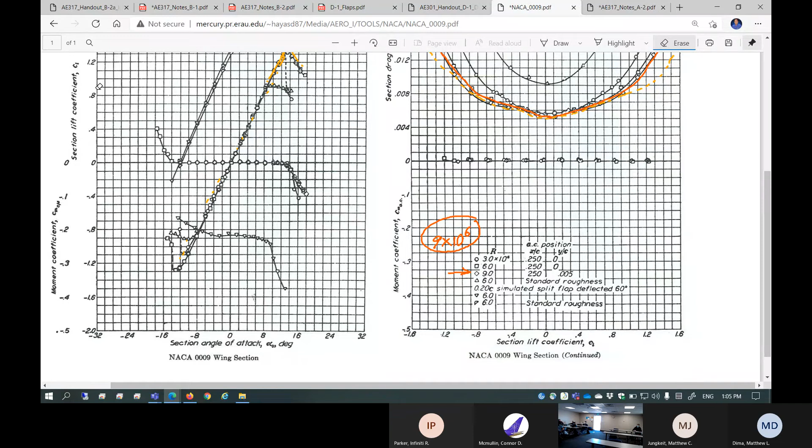Okay, so 8 degrees, right here. Right here, no, it's not quite 1. No, it's not quite 9 yet. I would say 0.85. 0.85, no, it's not quite 0.9 yet. This is the value given from textbook authors, Air Force Academy people say 0.85. So let's use it, okay.

So let's estimate. Next step is CL alpha, this is the lift curve slope of this NACA 0009 airfoil under this Reynolds number. So what you do is basically delta CL over delta alpha. Typical choice is you're going to pick 8 degrees of alpha, and this is alpha zero lift. Okay, this is alpha zero lift, alpha zero lift means 0 is the CL. At 8 degrees, you picked up 0.85. So this is going to compute to 0.106 per degree.

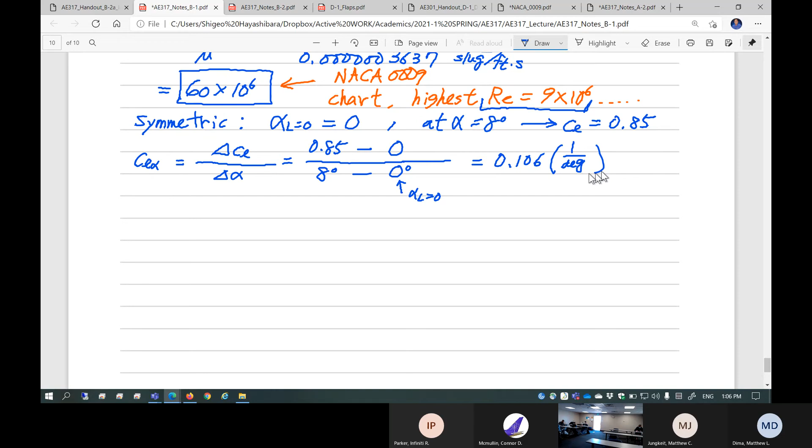Now, if this is aerodynamics, I'm going to convert it to per radian, but I'm going to use per degree as is because this is flight mechanics.

Next is dynamic pressure Q. This is 1/2 rho V squared. Density is given as 0.002048 slugs per cubic foot. Velocity is 300 feet per second. This squared gives dynamic pressure of 92.16 pounds per feet squared, which is PSF.

Next is aspect ratio. Let's find out the aspect ratio of the wing. This is wingspan squared divided by wing planform area S. Wingspan is given as 111 feet, squared, divided by wing planform area 3,964 feet squared. This gives you aspect ratio 3.1. Wow, this is a pretty low aspect ratio wing. Of course, it's almost delta.

So out of this information about the actual wing, you're now going to determine CL alpha, the lift curve slope of the wing. Of course you know the equation: this is CL alpha divided by 1 plus 57.3 CL alpha over pi times E times aspect ratio.

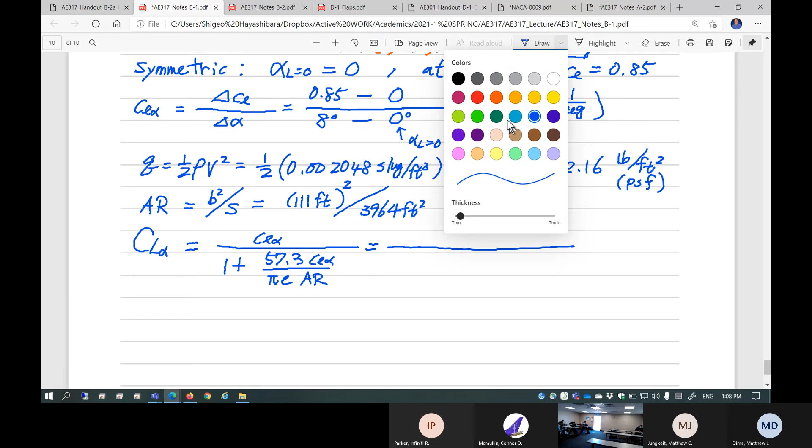Important thing, a big difference from aerodynamics: this 57.3 comes into play because I keep using degrees as the angle unit. So this is a conversion factor. If CL alpha is in per degree, you have to insert 57.3. This is conversion from degrees to radian.

So I'm going to use the per degree value. CL alpha is 0.106 per degree. And then 1 plus 57.3 times 0.106 per degree, divided by pi. E is span efficiency, which is wing efficiency, 0.9. Aspect ratio we found is 3.1. This is going to give you 0.0626 per degree.

So you need to realize that this value, 0.0626 per degree, is very much reduced, right? The 2D airfoil has a lift curve slope of 0.106 per degree. Now this is going to be reduced to 0.0626 per degree for the wing. Reduced, yes, big time. And this is a low aspect ratio wing, so its reduction is pretty steep.

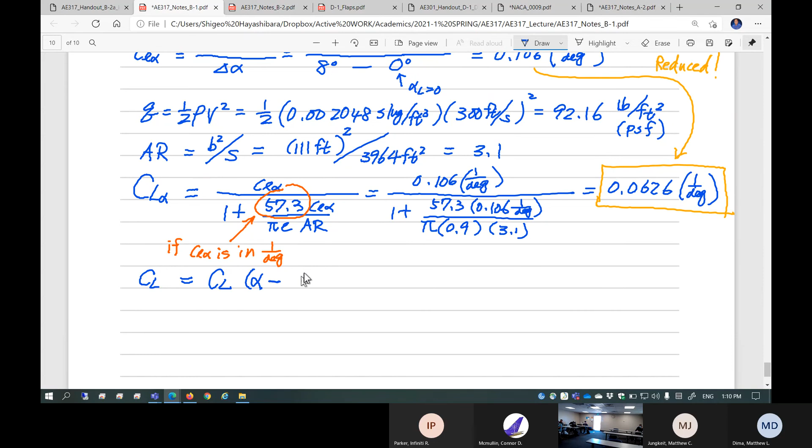Now the next step is, based on that information, you're going to predict the lift CL of the wing. CL of the wing is CL alpha times alpha minus alpha 0 lift. So this is 0.0626 per degree multiplied by 8 degrees minus alpha 0 lift, which is 0 degrees. So this is going to predict CL equals 0.5.

So this is CL of a wing at angle of attack 8 degrees. Let's compare this value against the original value, which is 0.85. The NACA 0009 airfoil is expected to have a lift coefficient of 0.85 at 8 degrees angle of attack. Now after you create the wing, you only expect 0.5, reduced, right? Oh my goodness, everything is reduced. So your wing design, airplane design, is about how much the reduction is minimized, okay? So that's the best design.